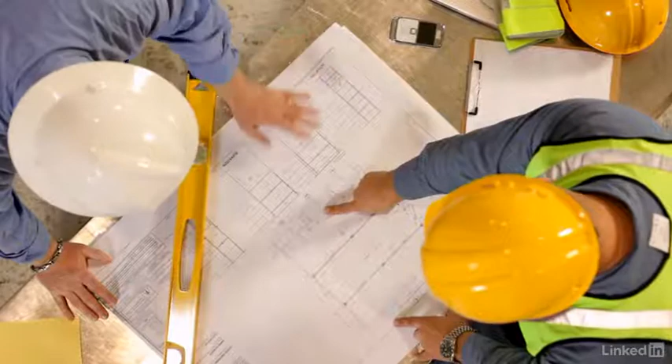Don't get me wrong, the industry is definitely in a transition phase, and I suspect we'll be in a transition phase for many years to come in terms of how we handle drawings out in the field. There are many of us in the industry that have been around for a while. Some of us just like those paper drawings, so it's going to remain common to see those rolls of plans on a construction project. But it's also going to become more and more common to see people viewing those plans on tablets and laptops out on the job site as well.

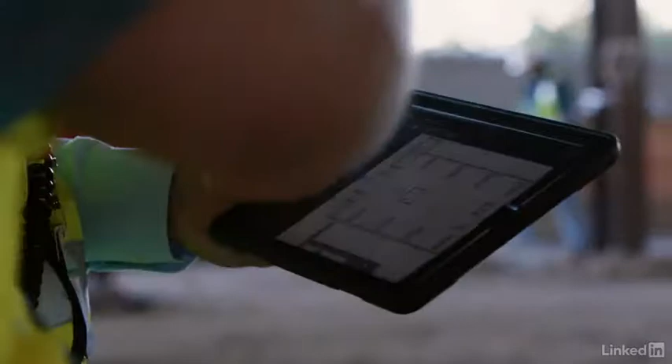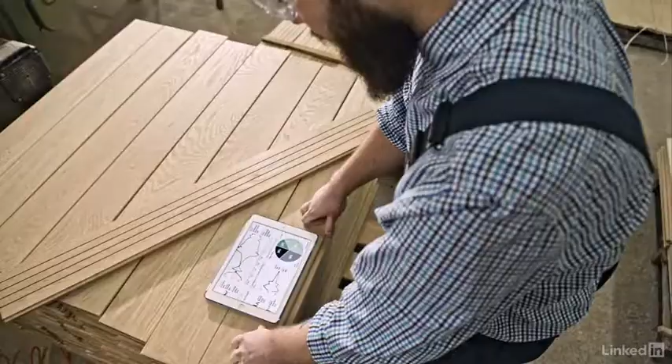These days, very few designers are drawing plans the old way. You won't see many drafting tables and T-squares in the offices of engineers and architects anymore. Most of them have embraced digital as their preferred method of drawing. And in fact, many of them are at least 2 steps into that transition already.

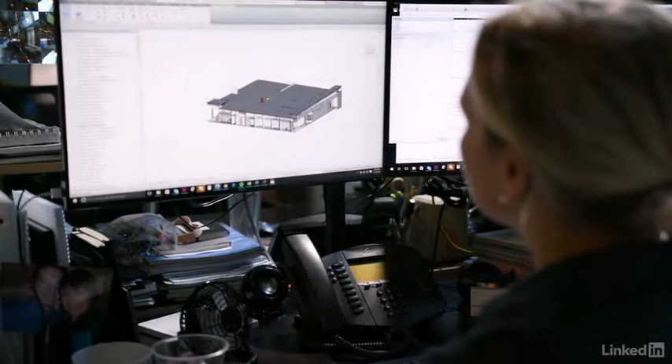And what I mean by that is that the first step in this transition was to CAD, or computer-aided design, which is what enabled these designers to start drawing plans on the computer in the first place. These drawings look much nicer, they're faster to create, and it's easier to make changes.

But many designers have already taken the next step in this digital evolution, and they're now designing and drawing in 3 dimensions. They're doing this using a tool called Building Information Modeling, or BIM, and there are several software programs out there today that fit into this category of BIM programs.

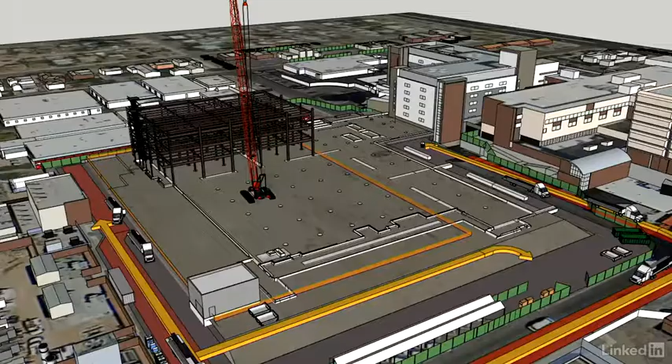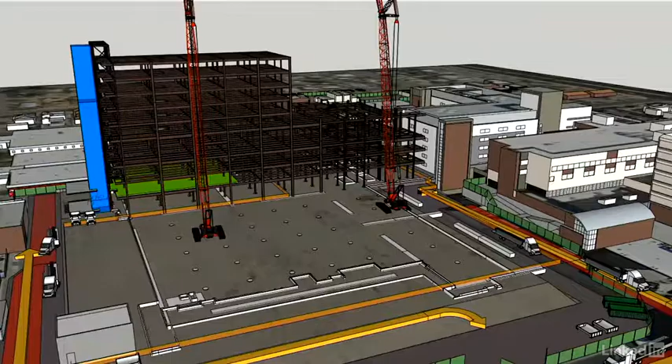Now, using BIM, designers can actually design in 3 dimensions from the beginning and create the structure virtually on the computer using 3-dimensional objects instead of lines. So instead of drawing a line that represents a pipe inside of a wall or a floor, they insert a virtual pipe into the wall or floor that they create in the software, and everything is to scale and in 3 dimensions. This means that this virtual pipe has thickness, because they insert it as, for instance, an actual 2-inch pipe instead of just a simple line.

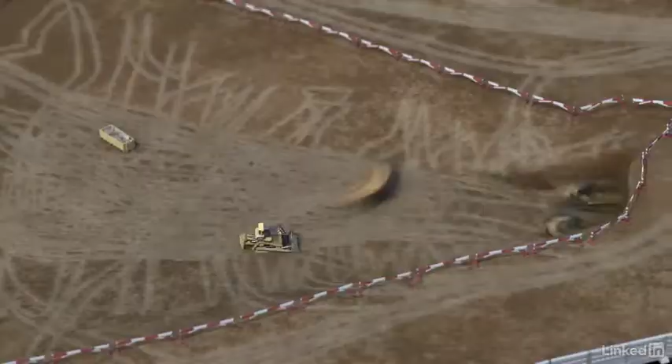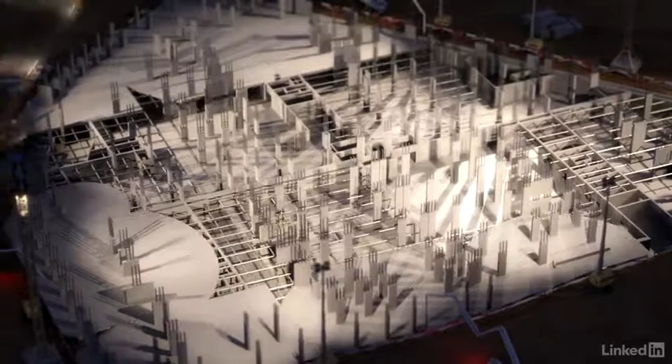And this is really becoming an incredible tool because by building the structure virtually first and in 3 dimensions, they have a better chance of finding things that don't fit and making corrections before they become a problem in the field. The other cool thing about this is that the 3D BIM models contain all of the information needed to build the job, so they can still use them to quickly create the 2-dimensional drawings that we use in the field.

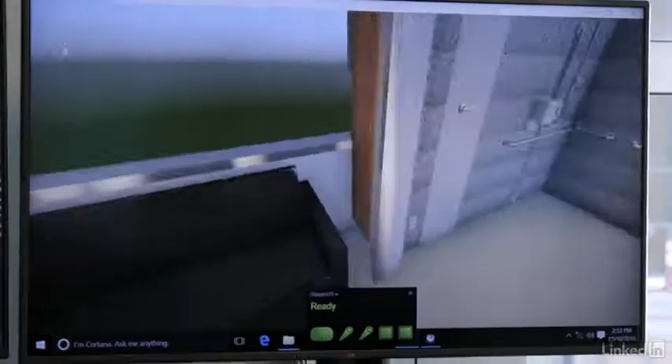As all of this virtual design continues to evolve, we will also see some use of virtual reality to put people inside these virtual buildings. In fact, virtual reality is already being used by some designers to put their clients inside their proposed design, allowing the owner to walk through a proposed building and get a better sense of what works and what they might want changed before construction begins.

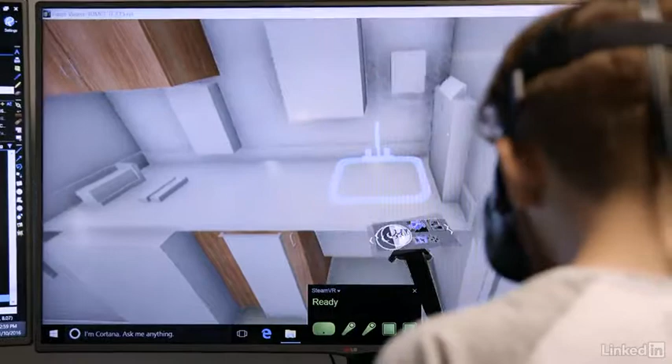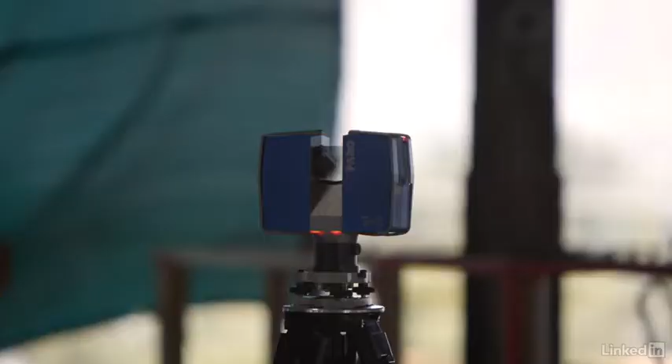With that already beginning to happen on the design side, it won't be long before we start seeing applications on the construction side. And think about it. Imagine a complex facility like a hospital with lots of things inside the walls and lots of fixtures in every room. Imagine being able to visualize this in virtual reality before you start building, so you can actually see where everything is supposed to go and how it all fits, instead of just looking at our 2-dimensional drawings.

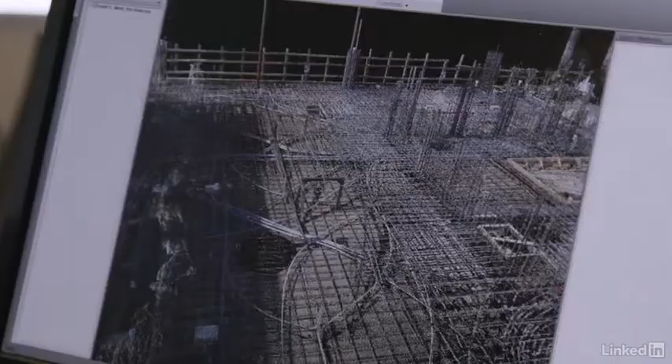So these are the directions that we're heading as an industry. The basic tools already exist, and it's exciting to see how the industry applies them and adopts these new methods of viewing designs.